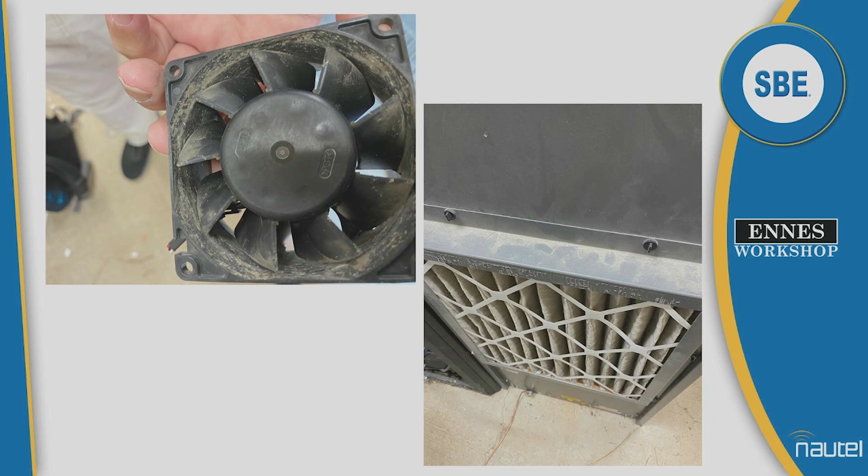All right, so this is just an example of the stuff you run into. And in this case, bless his heart, the owner told me it's a brand new site. It was built brand new, and it was a beautiful cinder block building. It's a nice building. He's got lots of air conditioning. Unfortunately, the air conditioning is blowing all the air past the transmitter, not through it, but that's a simple problem to fix.

And there was a little dust, and I'm looking, and it's like, this is a massive amount of air conditioning. Why do I see all this dust? Well, there's a half-inch gap under the door. So I found that. Tip number one, you ever figure out the way to find the gaps in your building? You go in the building on a bright sunny day, turn the lights off, and then just look for the glimmers of light. Well, it was easy to see the glimmer under the door.

I never thought of that one. I think I've pretty much blown up my clicker today. There we go. Yeah, it's like, I've got nothing left to give.

So we talk about grounding. The big thing about grounding: short, straight runs, as much as you possibly can. We don't want long, skinny gauge. If I can run strap, I'll take strap over cable any day. Number one, a lot more surface area. A 4-inch or a 2-inch copper strap has got more surface area than a 2/0 cable. And relatively speaking, a 2-inch copper strap is a lot less expensive than a 2/0 cable. And if you're looking foot by foot, it's got 1/10 of the resistance.

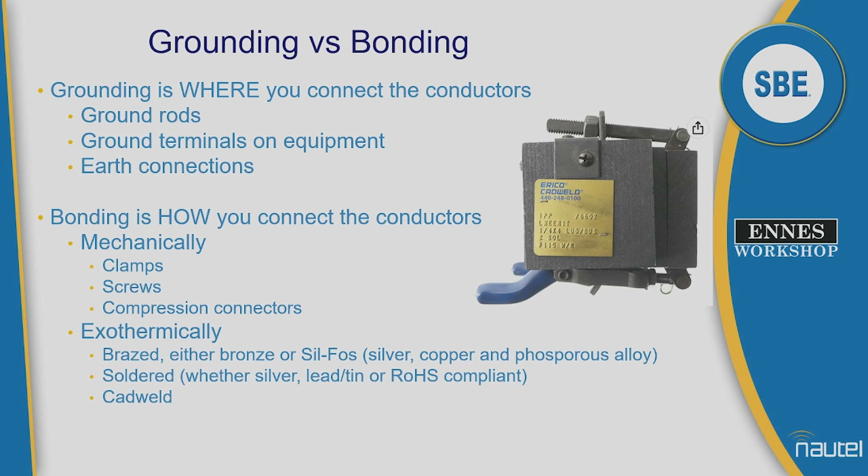Okay, so we're doing the grounding. Other challenge I run into is overgrounding. Now, this is something a lot of people don't think about. You can have too much ground. And I've told this story a zillion times. Half of you have already heard it, I know.

But I had a station in San Antonio, putting in an XL12. He calls me up and he goes, I got the ferrites on just like you like. And I said, cool, where? He goes, on the coax. And I said, wonderful. He goes, yeah, there's a problem. I go, what's the problem? He goes, it's hot. I go, what's hot? He goes, the ferrite. I said, well, ferrites shouldn't be hot. That means you get an imbalance current. Your feed and your return are not the same. We'll talk about ferrites in a second. It'll be a very brief second. He goes, no, you don't understand. The transmitter's not turned on.

He had the main transmitter grounded to the phaser, the main transmitter grounded to the standby transmitter grounded to the phaser, both of them grounded to the AC entrance, and the phaser grounded separately to a rod outside. And he had no idea where any of the current was going. You want to know the cool thing? That hot ferrite, when he turned the transmitter on, it wasn't hot anymore because it exploded. Problem solved, right?

A little side note, I got to ask this, and I haven't asked this question yet today, and I usually do at least once. How many people have never been to a Nautel users group before? Awesome, well thanks, welcome. Side related question, because Gary's sitting there and I know he's keeping score. How many SBE members in the room? Awesome, excellent, thank you. Well, welcome for that. How many of y'all go to the Ennes sessions? Okay, I'm not seeing nearly as many hands this time, and most of you are on the board, so I don't know, we got to work on that a little. All right, moving on.

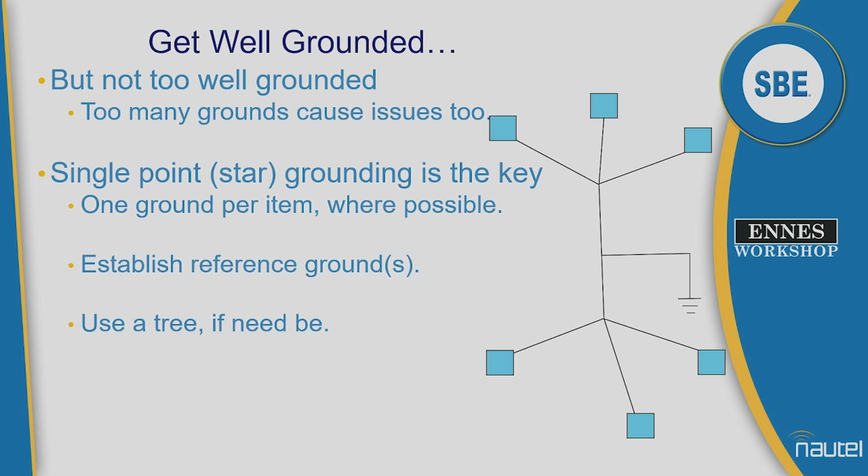I'm not sure exactly what I've done to put these in the order I did. I was very tired at the time. Let's just go with that. I did discover that if you try to download a slide deck over hotel internet in Vegas, it takes a few tries. I should have used my hotspot.

Okay, so this is a site in Chicago. This one was beautifully grounded, except, what did I say about, well, 40 slides ago, because I'm clicking through the duplicates, but short, straight runs as much as possible. Okay, the primary component of a lightning strike is in the audio range, coincidentally. Transmitters are designed to pass audio, coincidentally. So how we treat this is critical. Okay, there's also a high frequency component.

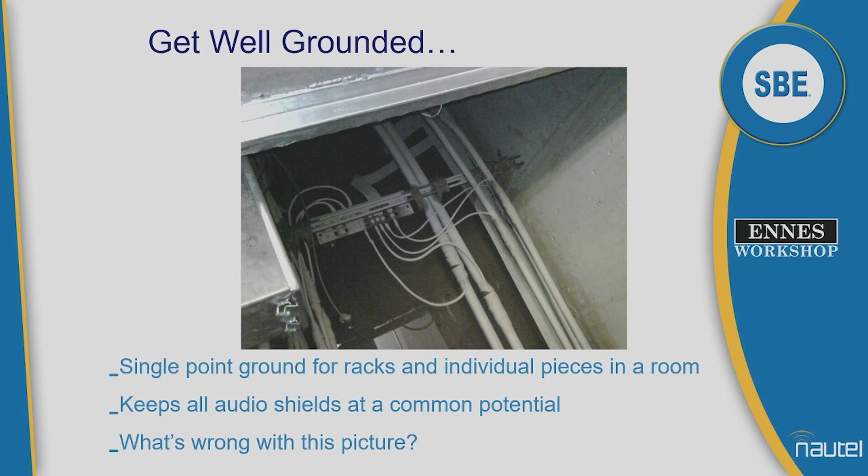When you add inductance, that high frequency component, no, I'm not going that way. Oh look, there's a transmitter, I'll go that way. Okay, short, straight runs whenever you can. Avoid loops, that's not straight. By the way, you don't need a drip loop indoors.

Now, I'm not a fan either of running your ground wire through a steel conduit, because how many hams in the room? Few. How many of y'all have ever made an inductor by wrapping a piece of wire through a ferrite core? So you take a piece of wire, wrap it through some ferrous material, and make a choke that blocks high frequencies. Conduit is ferrous material. You run a wire through a conduit, you made a choke that blocks high frequencies. Lightning says, oh, I'll just go through the transmitter instead.

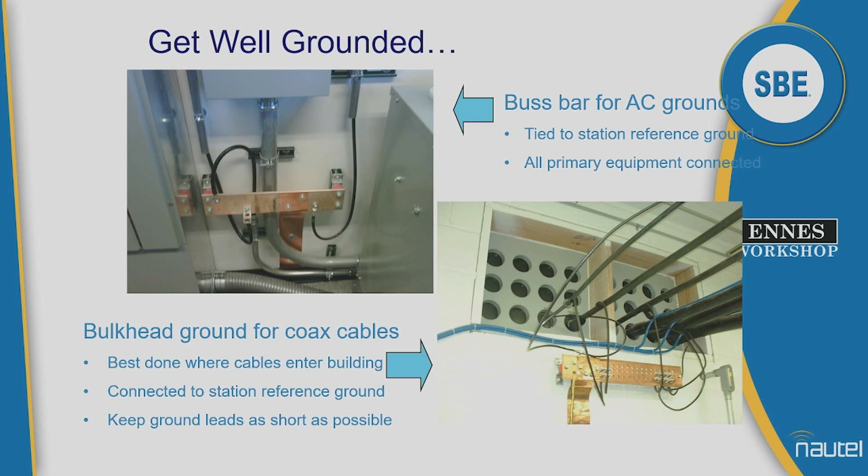Told this story a million times too. This is Springfield, Missouri. This is Kevin's fault. Because I was on the road, and I was in Quincy when we had the office there, and he calls up and he goes, what are you doing? I go, sales stuff, eating and drinking. He's like, can you go to Springfield? Well, I'm in Quincy. Springfield, Illinois is only about an hour away from Quincy. I said, sure, I can be there in a couple hours. He goes, cool, they got a station that's having some problems. Why don't you take Nelson down, go take a look. It's like, awesome. So this was right after Nelson started, so I guess it's more than a year or two ago. He meant Springfield, Missouri, which is not an hour away from Quincy, but that's okay, it was a fun drive.

So we get to the site, and the first thing you do when you're looking at doing a lightning protection assessment or a grounding assessment, start at the tower. That's where the lightning bolt's going to hit first, that big multi-100-foot lightning rod. Pretend you're a massive amount of current. Follow it back, see where you end up. Anywhere you got a choice, decide which is the lower resistance. I mean, you can do that by observation in a lot of cases.

So I start at the tower and I start walking back, and there's a beautiful nice shiny new 4-inch copper strap at the base of the tower. Hasn't been stolen yet, life is grand. So I follow it back and it goes to the building. And it goes right to the back of the transmitter. Now that on its own wouldn't be so bad, except there was one critical component missing. A ground rod. There weren't any. So the copper strap literally connected the tower to the back of the transmitter.

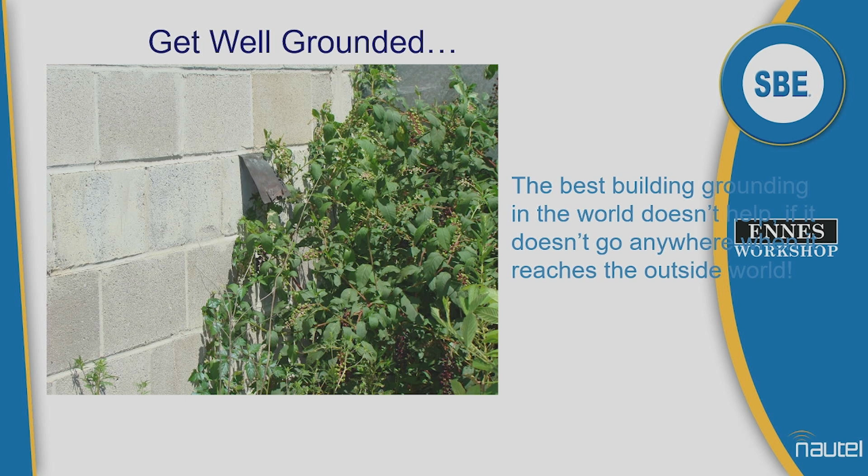Okay, ground rods. Ground rods have an effective volume, an area of influence, electrode interface hemisphere. That is saying that this ground rod is effective this far, typically just a little over the length of the rod that's underground. If you take an 11-foot rod and only stick the bottom foot into the ground, then your interface hemisphere is a foot and change for a radius.

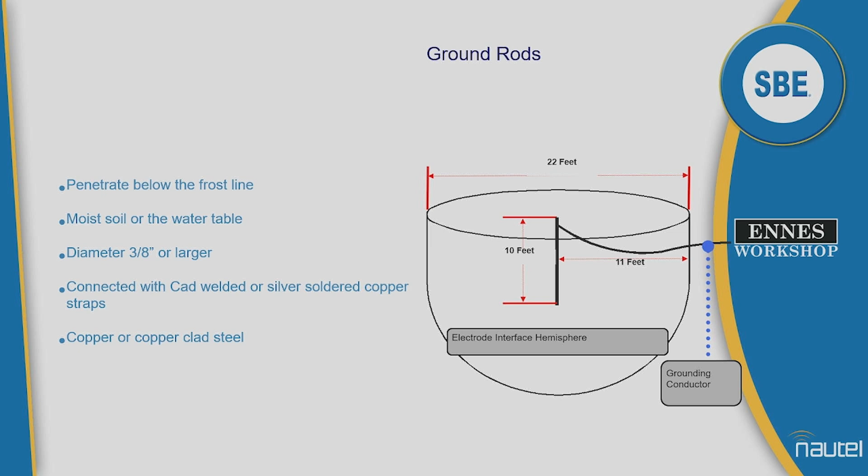The reason I bring it up, because a lot of people say, I got an 8x8 building, I put a ground rod at each corner and one in the middle, and I got two more over there and four by the tower, and it's like, wow, you just wasted a lot of copper and a lot of energy. It's not that it'll hurt anything, you're just wasting time. Two ground rods driven 8 feet into the ground, spaced a foot apart, is equal to one 8.5-foot ground rod, or 8 foot and 5 inches. If you're going to do two 8-foot ground rods, put them 17 feet apart. Now you've really improved the effectiveness.

Told you we were going to talk about ferrites again. So, somebody told me I should get one tattooed on me, but after watching Greg Buchwald from Motorola talk about Ohm's Law 2 days ago, I want the Ohm's Law wheel. The EIRP, yeah. That'll be my next ink, first ink, whatever ink.

All right, so ferrites, how does a ferrite work? You got a feed and a return, and a round circle of ferrous material, basically carbon, iron filings, and epoxy to hold it into whatever shape. As long as the feed and the return are equal, the ferrite's just a lump of carbon and iron filings. If you have a voltage spike, so you get a lightning strike discharging, then the ferrite will saturate and effectively induce an equal spike into the opposing legs. So the potential difference stays closer to the same. It's not 100% efficient, but it's an improvement.

Is a ferrite on its own going to do anything? No. If you get a big enough strike to cause damage, a ferrite all by itself with no grounding is probably going to explode, like the guy in San Antonio found out. But with good grounding and surge protection, remember, again, we're playing current divider game here. Every little bit helps sometimes. If you've got the grounding and the surge protection and don't have ferrites, you're probably going to be okay. But if you're starting to see a few failures, then maybe that'll make the difference.

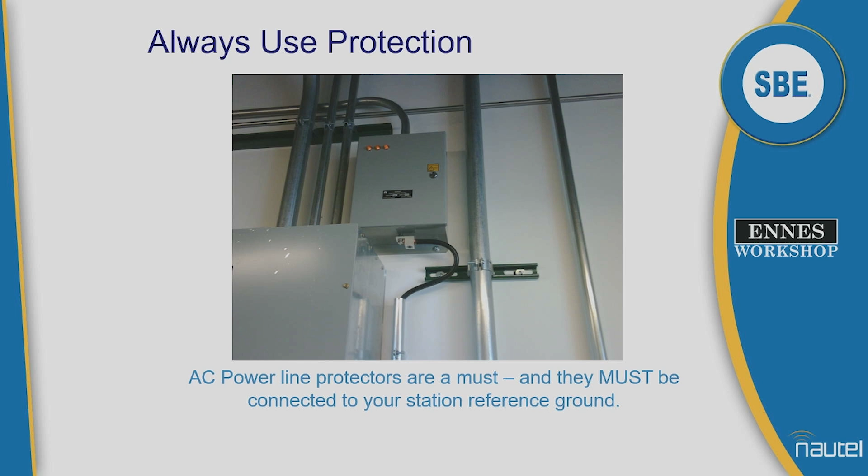Always. 100% of the time, they'll fail short circuit. If they're not fused with a suitably rated fuse, after they fail short circuit, they'll fail open circuit in a very dramatic fashion. They go boom. I had to say it at least once. Anybody who's been here before knows.

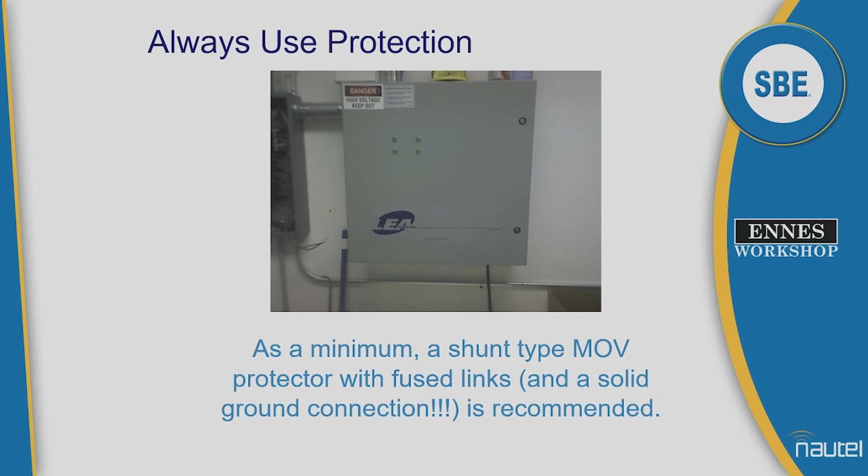So we don't care whose surge protector you use. We use Raycap these days. We've made our own in the past. LEA makes great ones. Transtector, PolyPhaser, Control Concepts. Pick your favorite. Don't care. Make sure you have surge protection. Because without the surge protection, you don't have the complete puzzle.

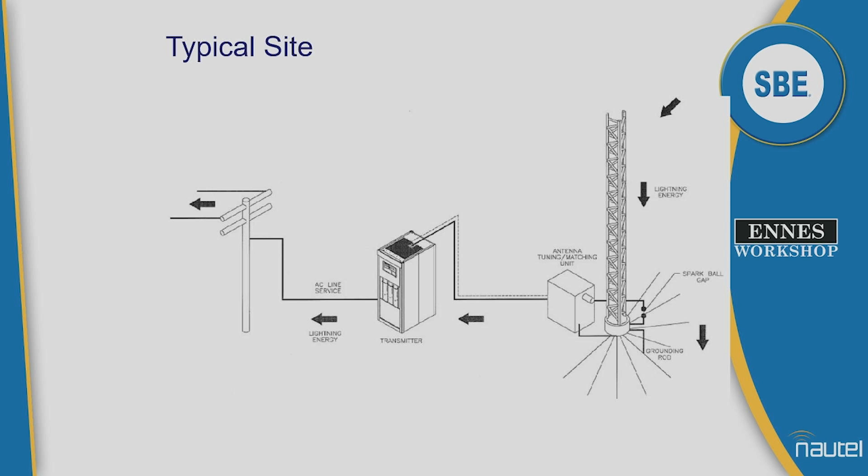Okay, I'm going to skip past this one and go to that one. Reason being, almost 100% of our transmitter sites are built wrong. Antenna out back, big lightning rod out back. Power line out front, more energy. Let's hang all of our gear in between those 2 places. What could possibly go wrong? And so what we want to do is this. Okay, that right there in a nutshell is easy. It seems so simple, right? How hard could it be?

The surge protector is the thing, the bypass, if you will, the path between power line and ground. Okay, remember, we got a multi-100-foot lightning rod back there. When you dump a massive amount of current down this thing, Earth has a resistance, unless you've got it totally paved with copper, which I'm willing to bet most of you don't. Now say Earth has a resistance of 3 ohms per foot. 9 ohms between my feet.

Wrap your head around this for a minute. Remember I mentioned the Ohm's law wheel earlier. What's Ohm's law? E equals I times R. Exactly. 9 ohms. Run 100,000 amps down that tower. What's 9 times 100,000? Even I can do that math after a week in Vegas. 900,000 volts between this foot and this foot means Jeff's having a bad day.

That's why they always tell you, in a lightning storm, if you're stuck in the field, put your feet together, crouch over and kiss your, put your feet together. All right? So it's both because we're going to spike ground potential high here as that energy tries to dissipate outwards. We can clamp this surge protector and dump a lot of it out on the power lines where the power company graciously provides millions of miles of conductors for energy to dissipate on. And lots of surge protection and grounds.

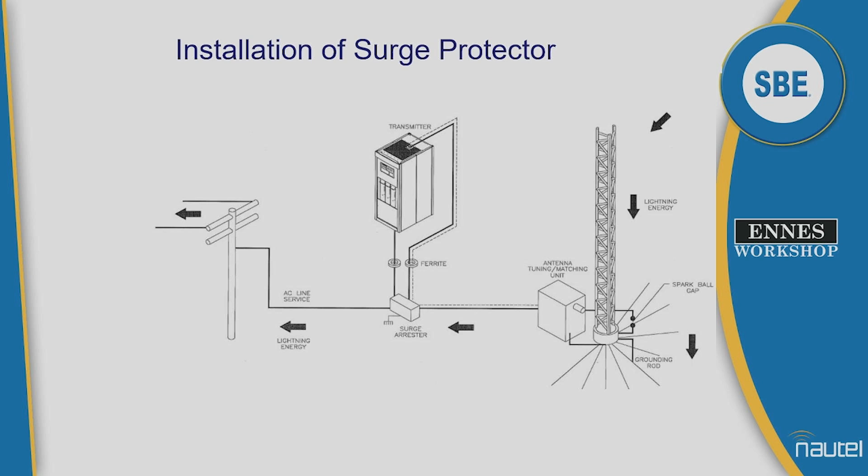Okay? By the same token, if you do happen to get a power line hit, not so common in urban centers, but much more common if you're at the end of the line in a rural area, the surge protector will clamp and shunt that energy to ground. Either way, it's going past my equipment, not through it. And that's the whole goal of grounding and lightning protection. Now, in this case, we've thrown a couple of ferrites on there. Like I said, matter of degree, we're just raising that impedance a little bit so that it makes an even less attractive path through my equipment. Like I said, always going to be my equipment.

Okay, now if you've got an existing layout, you can do some things. You can reroute the cable. Put your common point, your reference point ground, over by the main panel. When you have a choice, put your surge protector by the main panel, because the wiring to the surge protector will almost always be higher resistance than the strap from the surge protector to ground. Make sure it does have a ground connection too. So as close to the panel as you can get, run your strap over to it, life is grand. Ground your coax shield, because as we've discussed, the grounds on the tower aren't really doing a whole lot except to break up the capacitor.

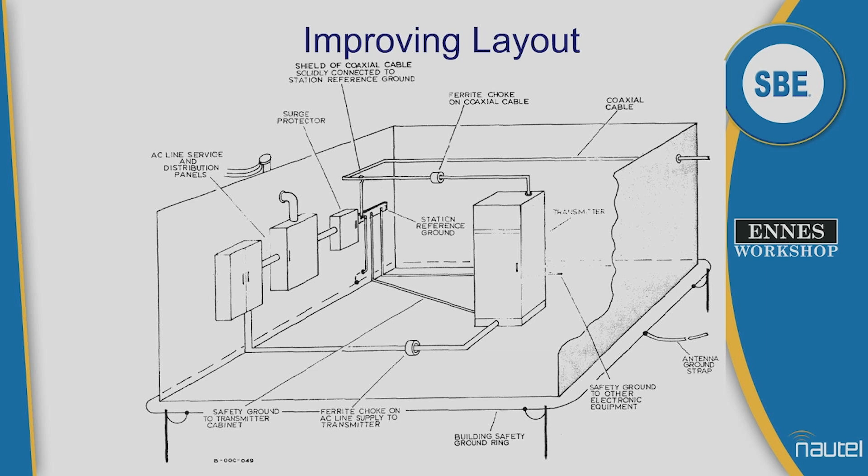Okay. I mentioned before about the air handling. Air handling is something done wrong more than it's done right. There are so many sites where I've walked in and they'll be blowing 10,000 cubic feet a minute of air through the building, but they're blowing it right past the transmitter. Well, what are you doing then? You're creating negative pressure and sucking air out of the transmitter instead of feeding it in.

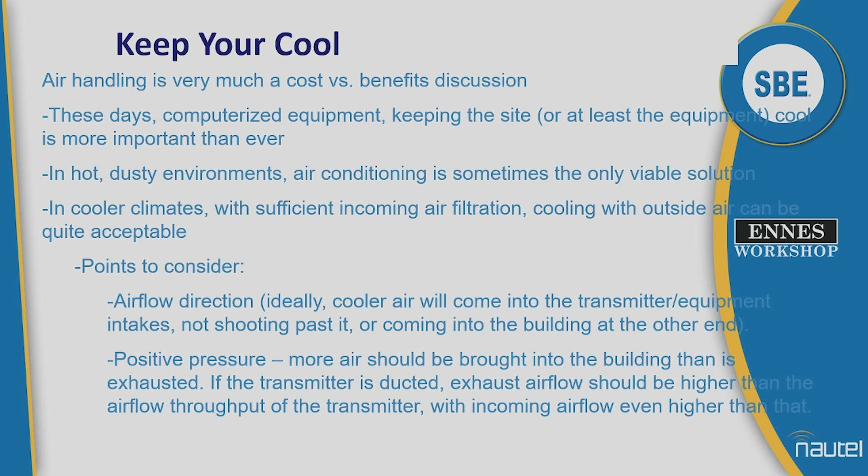Okay, we don't need the text. So instead of doing this, we need to not do that, do this: run the air through the equipment. How many people have got those Bard air conditioners, you know, the ones where they dump the cool air out the top and the hot air return down below, 180 degrees backwards for what we want in a broadcast facility?

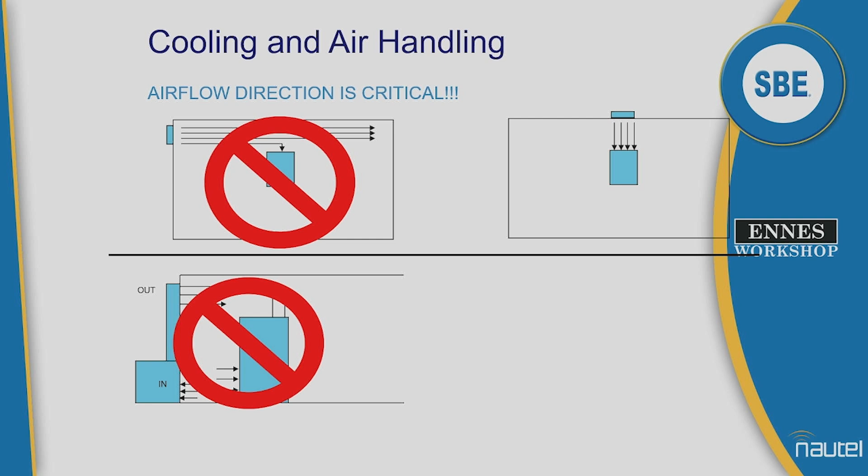It's great for anywhere where you've got people, because cool air goes out, filters down, cools the person without blowing air draft in their face. Life is grand. Transmitter doesn't care how comfortable you are. Okay? If you have a situation like that, find your local sheet metal guy, give him a couple of grand, create some ductwork, bring the cool air down.

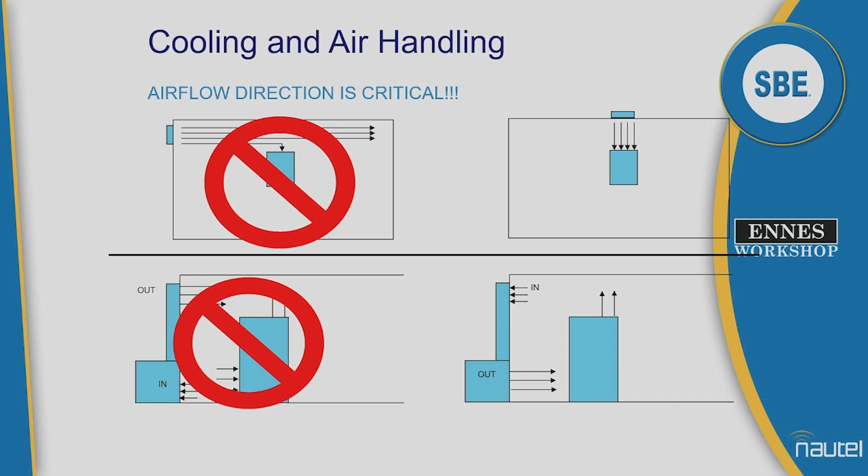Almost every transmitter on the planet, don't care whose brand it is, brings the cool air in at the back near the bottom. Now, like if you look at our big FMs, it brings air in the front too, and that's important because that's cooling the power supplies. Other manufacturers, they may have a little maze of air tunnels to cool stuff, so you got to bring more pressure in so you don't have the back pressure slowing down and causing hot spots. Pay attention, talk to your manufacturer, okay? These are the kinds of things that are relatively easy to fix, but they're still done wrong more than they're done right.

As an example, this big round flex duct was the cool air coming into the room. The duct down at the bottom, I don't know if I can hit that one from here. Oh, look at that, I'm pretty good at this game. That's the hot air return. The little gray box that you can barely see at the very back, that's the transmitter. And what we're doing in this case is pulling the air away from the transmitter intake.

Coincidentally, their failure rate was higher than expected. So all we did, we just rerouted that big flex hose, dumped the air down behind the transmitter, and then added a little ductwork to bring the return up to ceiling level. Failure rate went way, way down.

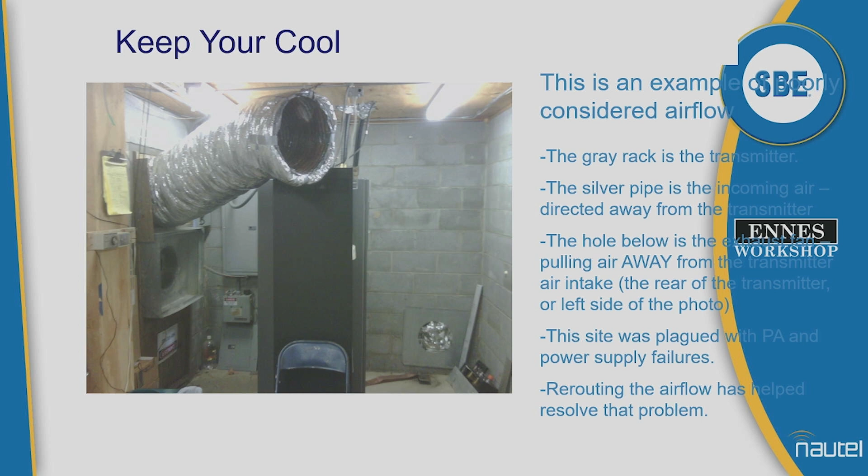The cool thing about this site, this was an involved owner. This guy was amazing. I've got pictures of him brazing the ground connections because I don't like clamp connections. 9 o'clock at night by a set of headlights, he's brazing his ground connection. That's the kind of owner you want to work with. We don't always get that option. I'm going to take a couple of minutes when we wrap this up, and we'll take a segue because I want to have a chat about that too.

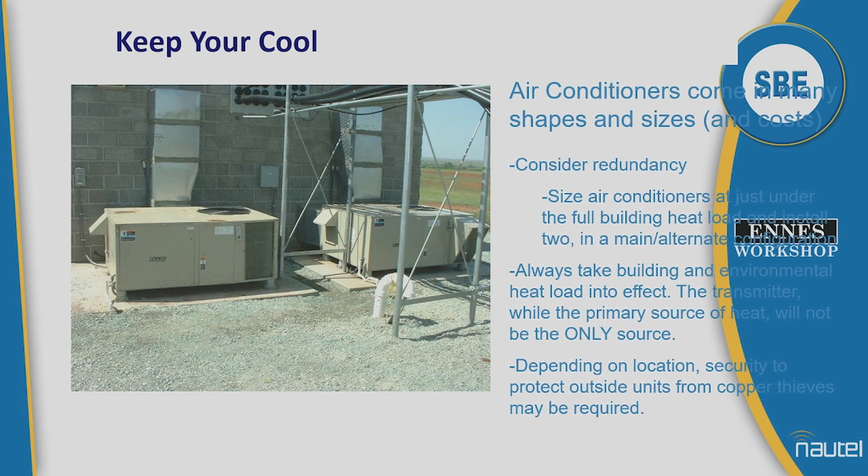Okay, also with air conditioning, don't oversize. An air conditioner that's too big is almost as bad as one that's too small. You can not remove enough humidity from the air, now not here where humidity is measured in single digits. Holy smokes, it's dry. But in a lot of places, like where I live, humidity is typically 70+%. And if you've got too much air conditioner and it's not cycling often enough, all you're doing is helping that humidity increase. Anybody from Florida knows what I'm talking about.

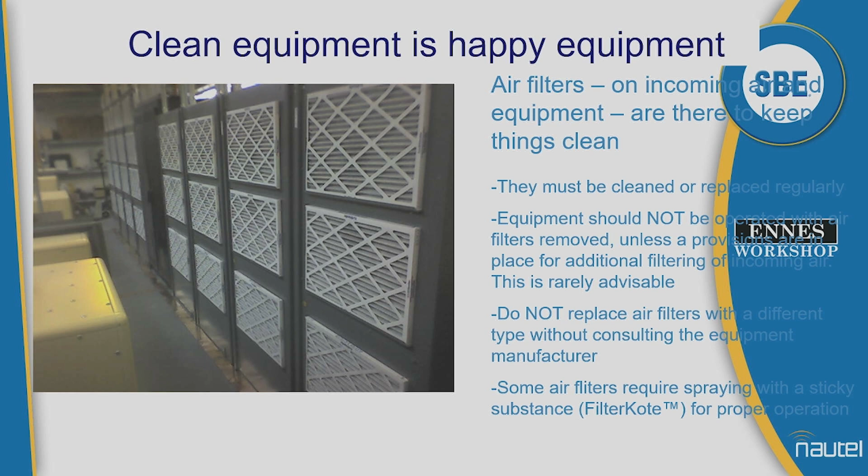There are only 3 things you need to take away from this presentation. 3 words: cool, clean, grounded. If you keep a transmitter cool, clean, and well grounded, I don't care whose logo is on the front, I don't care how old it is, I don't care whether it's tube or solid state, it's going to live a lot longer. If you fill it full of dirt and let it run hotter and stink, it's not. And again, I don't care whose logo's on the front. Same with all your equipment.

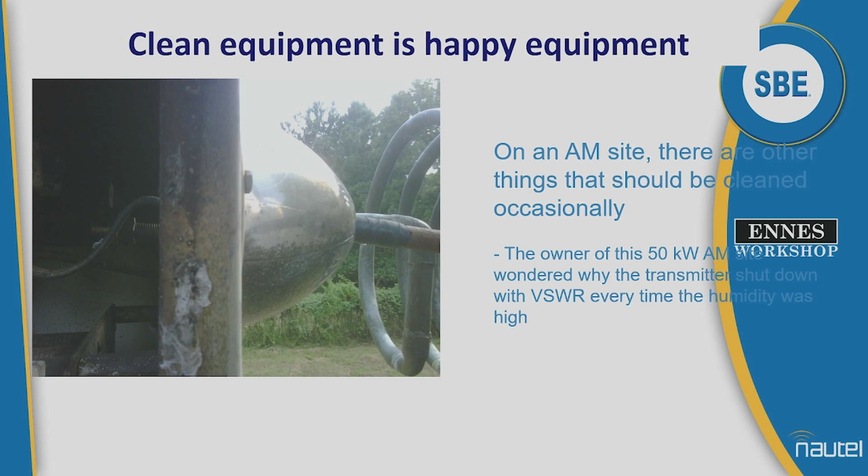It's funny how when you fill a bowl insulator full of ant farm, whenever it gets a little moisture, weird things happen. Okay, so like I said, cool, clean, grounded. Those are your takeaways from that.